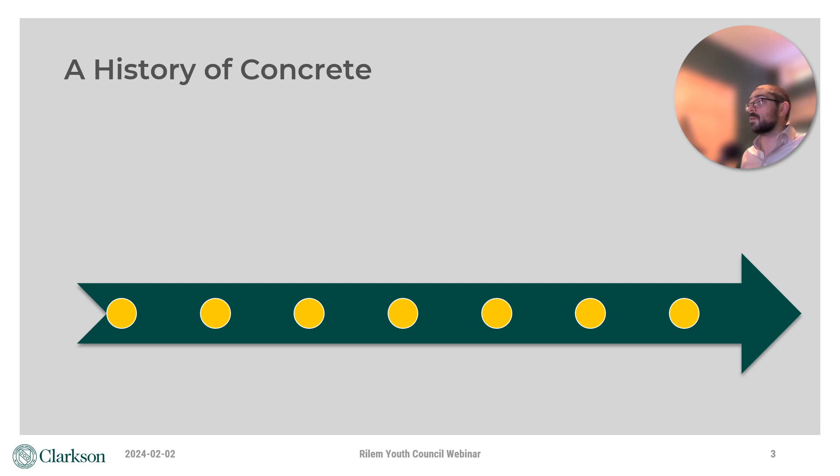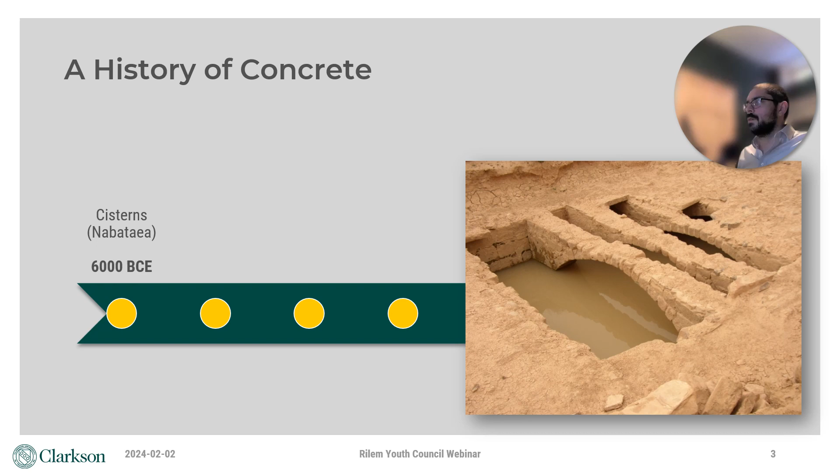Before we talk about that, let's take a short trip through the history of concrete. We hear a lot today about unlocking the secrets to Roman concrete. A lot of folks say that the Romans invented concrete, but that's not quite true. In fact, we have evidence as far back as 8,000 years ago of the Nabataeans building masonry cisterns with hydraulic lime mortars. And there's evidence of Egyptian societies making masonry mortars 5,000 years ago. The Romans built the Pantheon roughly 2,000 years ago.

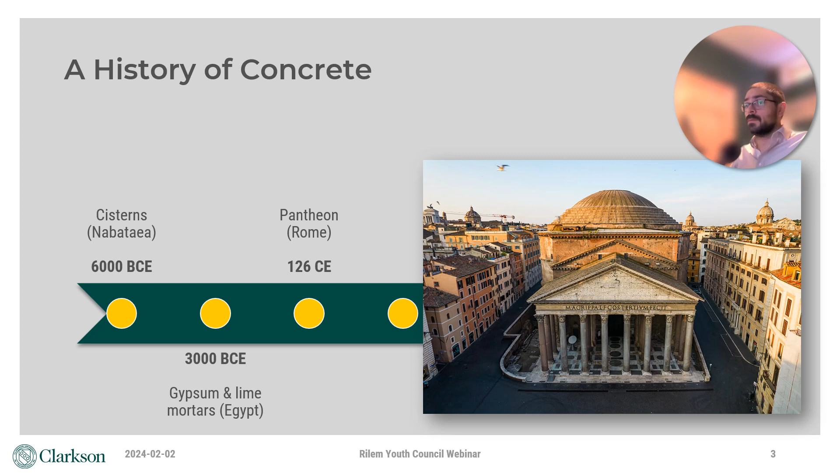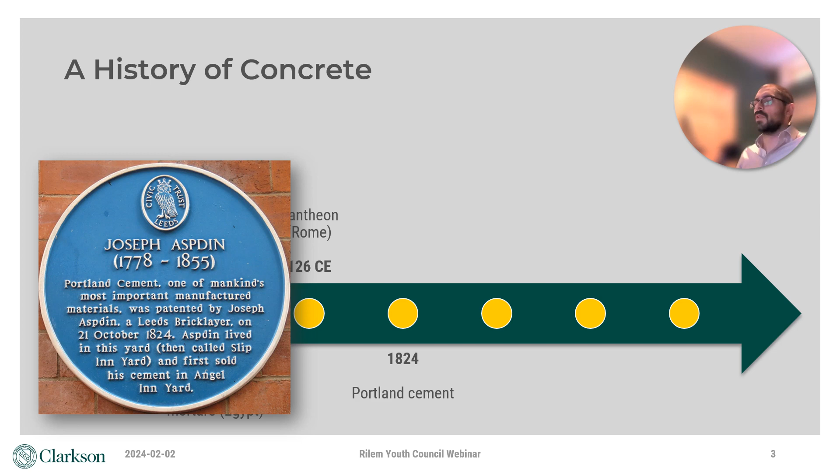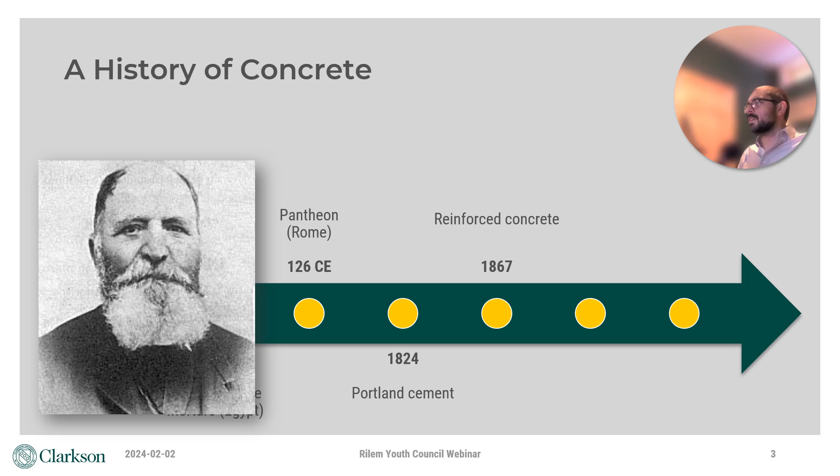And it was almost exactly 200 years ago that an English bricklayer named Joseph Aspdin patented Portland cement, which is still the basis of nearly all the concrete we make today. Reinforced concrete didn't emerge until 1867 when a French gardener named Joseph Monnier used steel rods to keep his concrete garden beds from cracking.

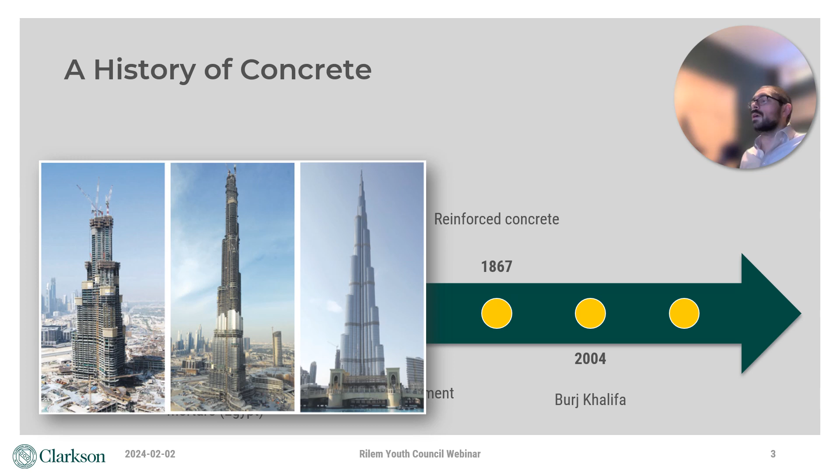20 years ago, and less than 150 years after the invention of reinforced concrete, construction began on the Burj Khalifa, which still stands as not only the tallest concrete structure, but the tallest man-made structure of any kind. And just a few years ago, cements were hydrated aboard the International Space Station for the first time ever.

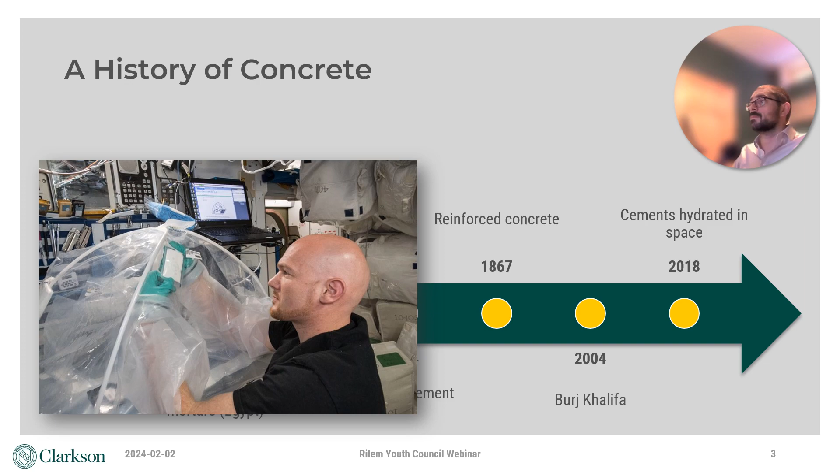Let's talk about another critical date, December 14th, 1972. That was the last time a human being set foot on our nearest celestial neighbor, the Moon. Apollo 17 was the 11th and final mission of NASA's Apollo program, which visited Earth's moon 6 times between 1969 and 1972. Each mission provided invaluable data about the geography of the moon, the composition of its soil, the conditions of its atmosphere, and more. But by 1970, the cost of the Apollo program had become astronomical, the public had lost interest, and NASA scrapped its plans for further trips to the moon.

Artemis, the twin sister of Apollo, is a fitting name for NASA's mission to bring humankind back to Earth's moon. Initiated in 2020, Artemis will bring the first woman and the first person of color to the moon. It will establish the first long-term human presence on the lunar surface, and it'll use the moon as a stepping stone to reach our next nearest celestial neighbor, Mars.

As part of the Artemis mission, NASA's Moon to Mars Planetary Autonomous Construction Technology, or MMPACT program, is developing technologies to support construction of key infrastructure on the moon. Repeated missions to the moon will require landing pads to prevent dust plumes, which can take hours to settle in the moon's low atmosphere. Extended human presence on the moon will require pressurized habitats and life support systems to protect occupants from the harsh conditions on the lunar surface. Broad exploration of the lunar surface will require roads, shelters, berms, and other civil infrastructure, and NASA has ambitiously targeted the late 2020s for the first demonstration-scale lunar projects and the early 2030s for construction of the first landing pads.

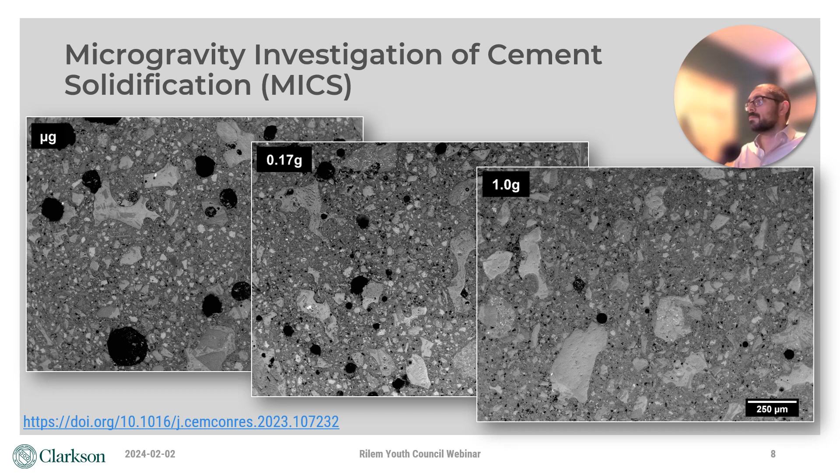We wanted to learn about the strength of the material, but it's very expensive to send samples to the space station, so the samples we send are far too small to perform any mechanical tests. So we do something called nanoindentation, which is when we take a microscopic probe and indent the surface along a grid pattern to see how hard and stiff the material is at that location. This helps us understand the strength of the particles within the microstructure, which we can then feed into a numerical model that might help predict the structural scale properties.

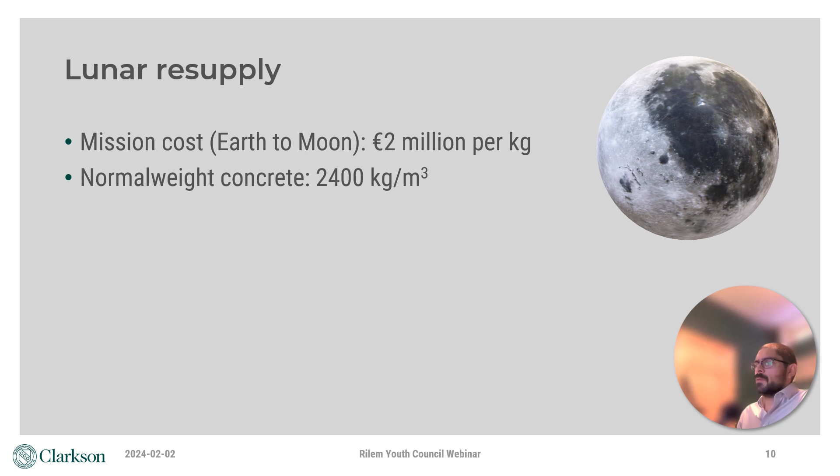As I said though, the MICS study focused on Portland cement. And while it helped form a basic understanding of how cementitious materials might behave on the Moon or Mars, Portland cement is really not a viable option for lunar construction, and the primary reason is cost. Let's do a quick thought exercise. It costs about 2 million euros to transport 1 kilogram of material from the Earth to the Moon. And normal weight concrete weighs about 2,400 kilos per cubic meter.

So let's say we want to construct a landing pad. Maybe it's 20 by 20 meters and 300 millimeters thick. That seems like a reasonable landing pad to land a lunar lander. This equates to about 120 cubic meters of concrete and a projected cost of 240 million euros just for transportation of the raw materials.

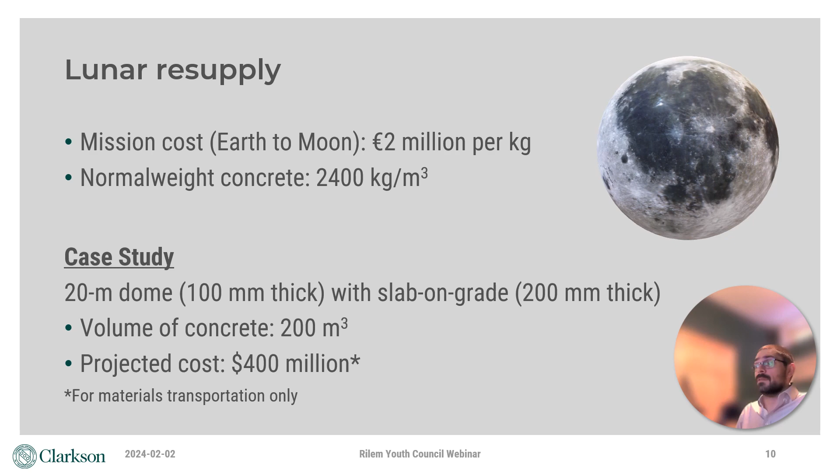Maybe we want to construct a 20-meter dome, some type of human habitat. Maybe it has 100 millimeter thick walls and sits on a 200 millimeter thick circular foundation. This is a pretty small habitat actually and could potentially house maybe a small handful of people. That equates to 200 cubic meters of concrete for a projected cost of 400 million dollars just for transportation of raw materials. This is clearly not sustainable, so we need to find a better solution.

That better solution is in-situ resource utilization, or ISRU. According to NASA, ISRU harnesses planetary resources at mission destinations to enhance the capabilities of human exploration. In other words, ISRU is using what's already there. Obviously, if we're to achieve a sustained human presence on the Moon, we need to learn to harness the resources it offers. In terms of construction materials, the Moon has rich resources in the form of lunar regolith.

That's just a scientific term for the lunar soil. And on the right, you see an image of Buzz Aldrin's footprint in the lunar regolith from the 1969 landing. There's also some water on the Moon, but it's relatively scarce, somewhat difficult to extract, and it'll need to be conserved.

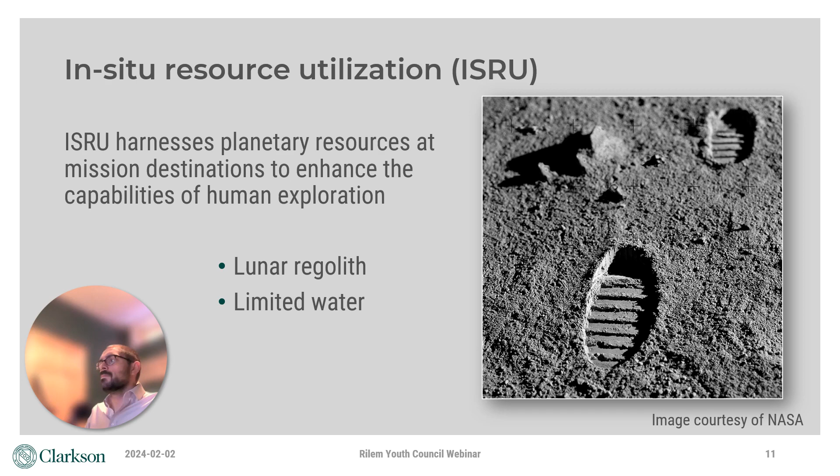Fortunately, over the last several hundred years, concrete researchers have developed a pretty robust toolbox of technologies that can be used to make concrete. One of those technologies is geopolymers, or alkali activated concrete. Geopolymers are cement-like binders that are made by combining an aluminosilicate material with an alkaline activator. On Earth, we make geopolymers with fly ash or slag cement, but this technology works with just about any aluminosilicate material, of which the lunar regolith happens to be one.

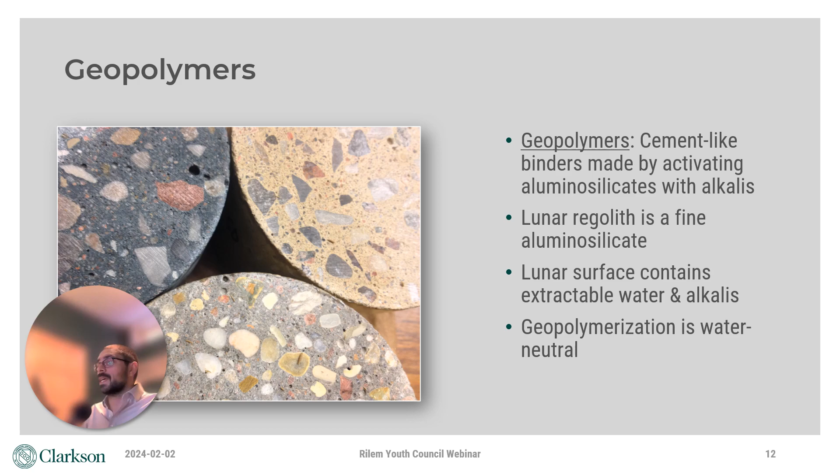Interestingly, the lunar surface also contains some extractable alkalis, so the activators could potentially be produced using the principles of ISRU. And finally, geopolymers do require water for mixing, for workability and consolidation, but the geopolymerization reaction is actually water neutral, so that water could potentially be recaptured. So lunar regolith-based geopolymers seem like a pretty promising solution.

But only a few hundred kilograms of actual lunar regolith have been collected from the 6 Apollo landings, and unfortunately, NASA is not about to give that away to a bunch of concrete researchers. Fortunately, however, various parties have produced what we call lunar simulants. These are carefully selected and graded mixtures of Earth minerals like volcanic glass and feldspar that can mimic the actual lunar regolith. Some of these are very basic simulants that model the geotechnical properties of the regolith, and some are more specialized simulants that mimic the chemistry or mineralogy quite closely.

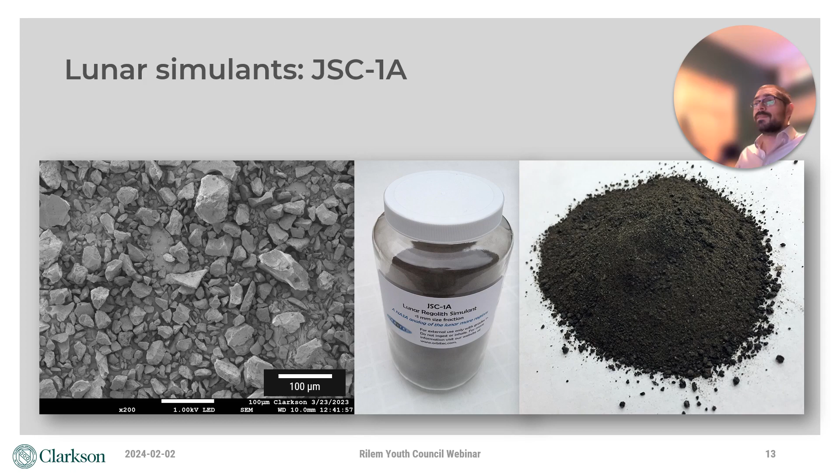We've used a variety of simulants, including the one I show here, which is JSC-1A, which stands for Johnson Space Center 1A. And even though this is made from terrestrial materials, the supplies are still quite limited. With JSC-1A, actually only 40 tons of the material were ever produced, and it's currently out of production. So these samples are still quite precious. Our colleagues at Penn State used JSC-1A and a variety of other simulants and a series of alkali activators to produce lunar simulant-based geopolymers. And again, they graciously shared some of the samples with us at Clarkson.

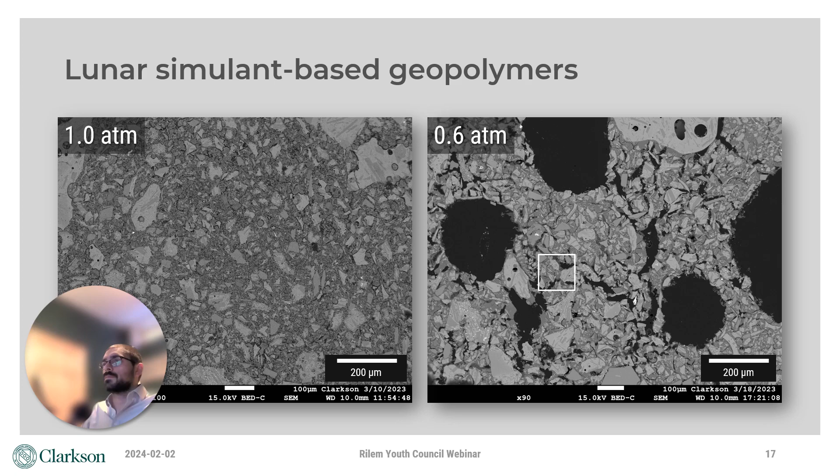The weathering conditions on the moon are another critical challenge. Without an ozone layer, lunar structures experience much stronger solar radiation than Earth structures. They'll also experience significant temperature fluctuations and constant abrasion by lunar dust and micrometeoroids. We need to know that they'll hold up to these aggressive conditions, so NASA and our partners at Penn State sent some lunar concrete samples to the space station and put them outside in a special platform where they were exposed to the low Earth orbit for about 6 months.

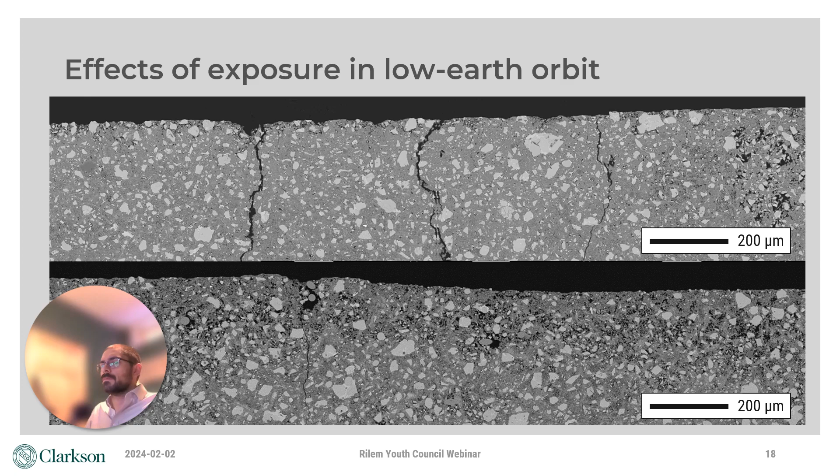So we know from this that fiber reinforcement is probably going to be a critical part of lunar concrete in order to produce durable lunar structures. So clearly we have a lot of work going on and we're trying our very best to develop lunar concrete technology and solve the various problems that appear along the way. But at this point, I think it's very important to acknowledge that our part of this work is small.

There are so many other material technologies being developed that are just as promising, if not more promising, than lunar geopolymers. There are calcium sulfoaluminate precursors on the moon that could be used to make ettringite-based cements. This image shows the needle-like ettringite crystals that are the basis of these high early strength binder systems.

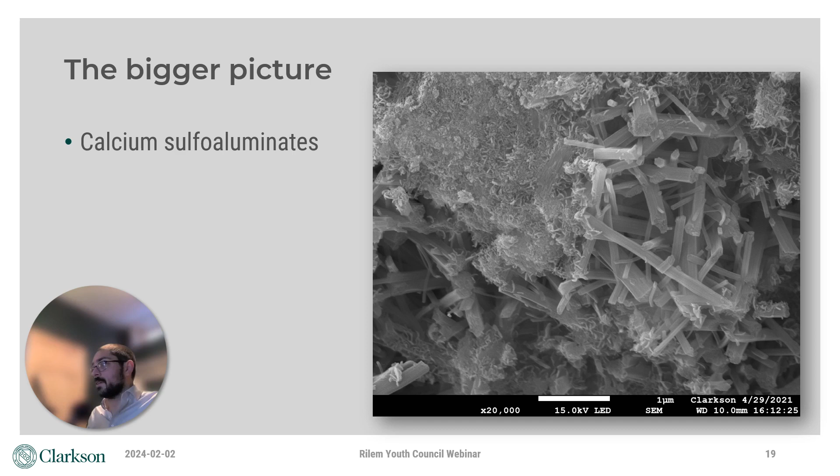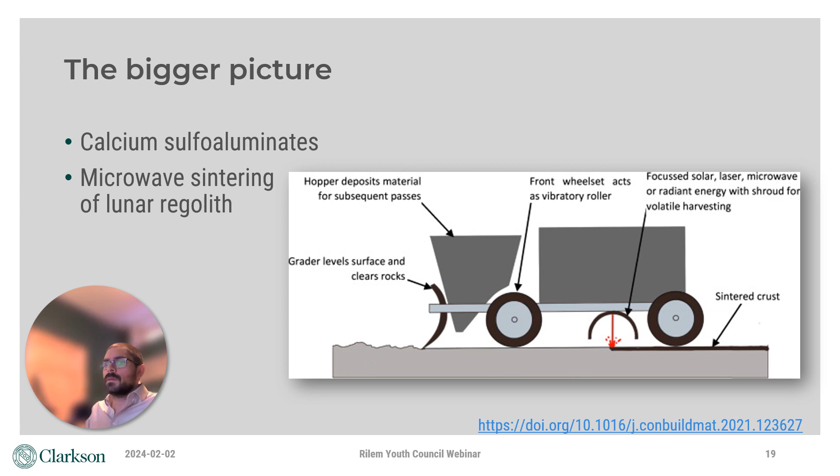There's also microwave sintering of the lunar regolith, where the regolith itself is melted and fused together to form a solid matrix. This is probably the most mature technology, and a great deal of thought has been put into how it can be used to make landing pads on the lunar surface. Here's one iteration where a lunar rover could theoretically be used to autonomously grade, compact, and sinter the regolith, forming a landing pad. There are also a series of other technologies that are quite promising.

But there's an even bigger picture beyond that. We've only talked about the construction materials part of developing lunar infrastructure. If we zoom out even further, we realize that the materials side of this challenge is still only a very small part of the mission. There are so many other barriers to extraterrestrial construction that need to be removed or overcome. We need to provide power and life support systems. We need to handle raw materials extraction and manufacturing processes. We need on-site testing and quality assurance.

So while it's appropriate for us to have some pride in our work and the advancements we're making, it's equally important to have some humility and recognize that we're part of a tremendous multidisciplinary team working together to solve an enormous challenge.